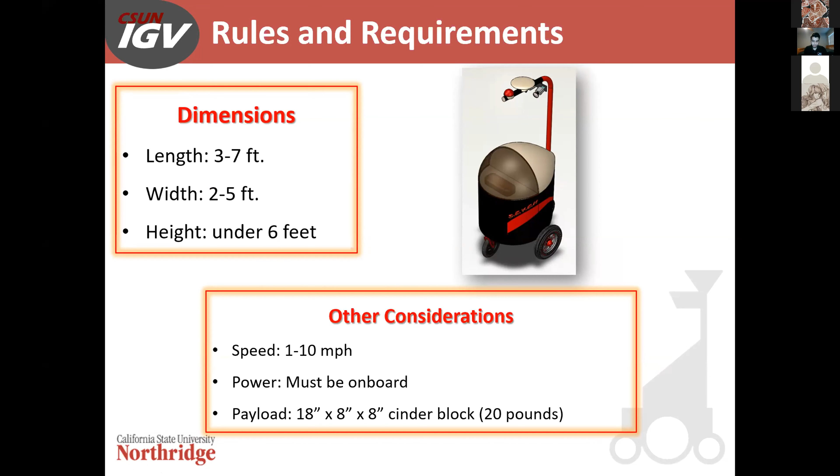Other considerations that are important and provide quite a challenge are weather conditions. Because it is in Michigan, we have to design for rain, high humidity, and high temperature. This is important because we're dealing a lot with sensitive sensors. All of these factors are really critical when designing the robot, just to make sure we don't fry any of our stuff.

Other design considerations that prove quite a challenge are designing this thing to go over grass. The field is almost completely grass, so we have to design our robot with proper suspension to reduce noise for our sensors so we can get accurate readings. We also have to travel over uneven surfaces, mud puddles, speed bumps. There are ramps as obstacles on the field, which are about 20 to 15 degrees. And we even have to design our robot to go over a sand pit.

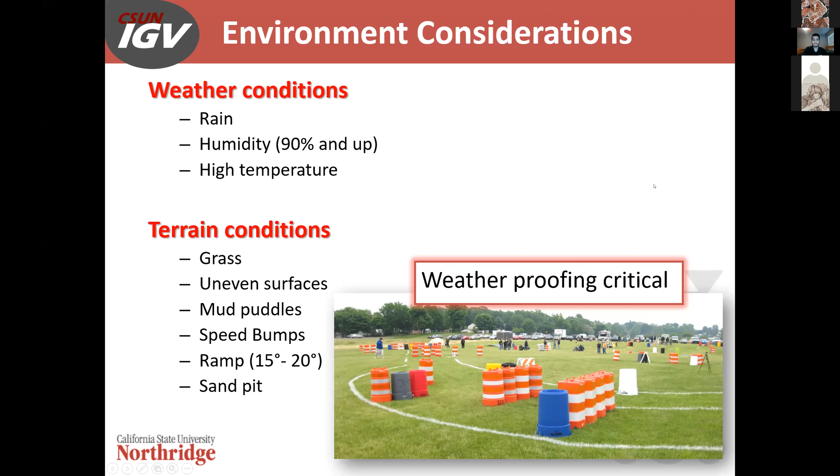Next is our emergency stop. This is a really important aspect to our robot. It allows the judges to safely operate the robot.

The ones we are working with now are a physical e-stop, which is a mushroom switch, and it's basically a physical break in the circuit. The other one we have to deal with is a wireless e-stop, which has to work up to 150 feet away and has to be waterproof.

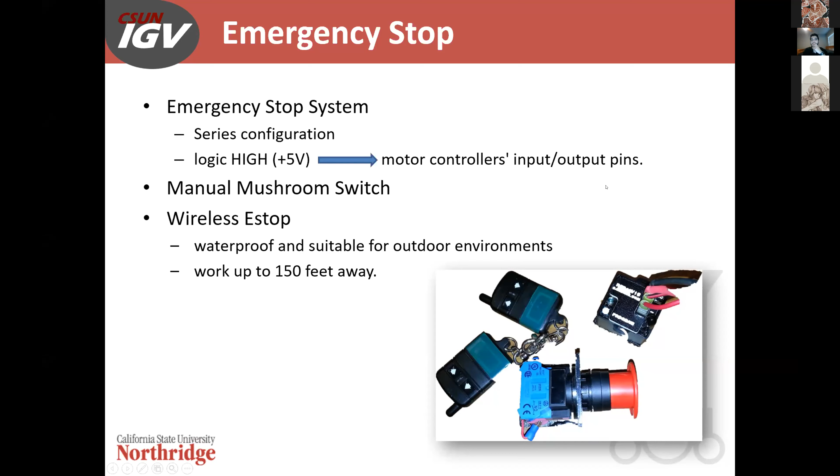So this is the AutoNav challenge, which is the main goal of the robot. It's got to navigate an obstacle course, search for navigational waypoints, stay inside the boundaries of the course, and appropriately avoid flags and barrels. All of this has to be done autonomously.

We do this by creating a cognition, if you will, in which the robot can accurately map its surroundings and navigate through its virtual path. This is the cool part of the robot because it's very cutting edge technology. All the advances in this field have happened within the past 15 years, so it's really awesome to hop on the leading edge of that. We're kind of seeing the fruition of that in warehouses, where they're designing these kinds of robots to do that. But this stuff is really quite new.

So here's an example of what our robot has to do. All these little dots are barrels. Our robot navigates through these white lines, sensing the lines, navigating around the barrels, and hitting all the stars. Then it crosses through a fence, hits all the stars on the other side, and returns back to its position by crossing through a flag field, which requires detecting these little flags and color coding them correctly, passing only on one certain side of them.

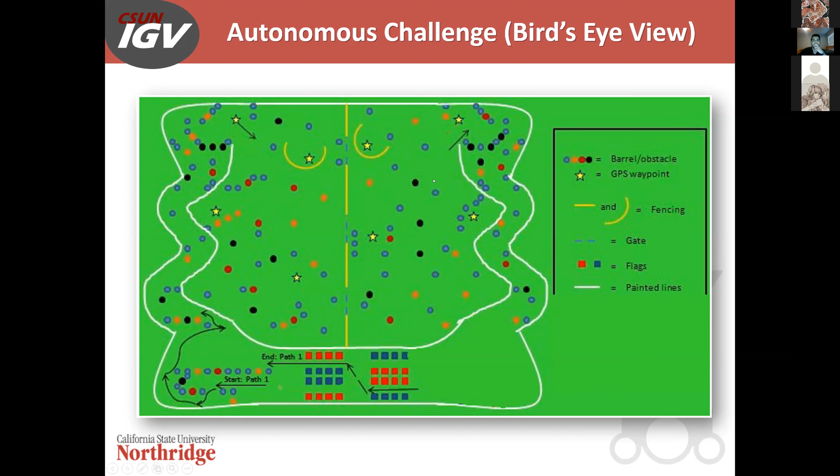So if you want to show them the animation. Yeah, so...

So what's it called? How do we do this? How do we avoid the obstacles? We have to program the robot to build a map by, one, being able to isolate white lines to detect these lanes, and two, distinguish obstacles like flags and barrels. We do this by using vision cameras, laser rangefinders, and LiDAR sensors.

One interesting aspect of this is image processing, in which we use certain techniques to isolate features that can be translated and mapped. We do this by using saturation limits of pixels to detect lines and colors that we can use to appropriately recognize obstacles such as flags.

Next is the IOP challenge. This stands for interoperability profile. Basically, we have to show the judges that a robot can intercommunicate with itself, that it operates coherently with precise goals and is cognitive of its surroundings.

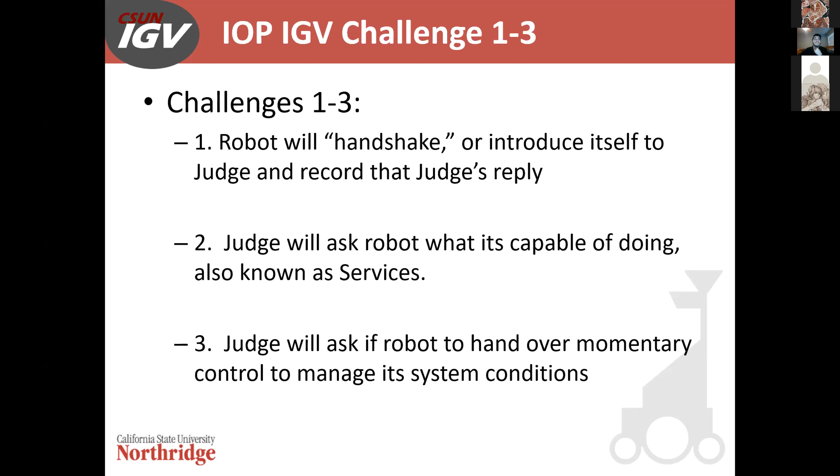This would include being able to introduce itself to the judges, recognize things, tell the judges what it's doing, and hand over momentary control to the judges to manage its system conditions. The other three would be, next slide please.

Being able to tell the judge its velocity state at any given time, report its location and where it's going, and then be able to traverse to 4 specific waypoints or areas of interest autonomously.

Here's an example of all the stuff that we are able to work with. We've got several different sensors, such as cameras, GPSs, DC motors, LiPo batteries, laser rangefinders, LiDAR sensors, e-stops, IMUs (inertial measurement units), and a PCB board.

The cool thing about this—I know you guys are all mechanical engineers, and a lot of this is kind of outside our field—but I think the best part about this project is it really rounds yourself out, especially for those wanting to get into robotics, because you're working so much with sensors that are really prevalent in robotics industry applications today.

You won't be able to get a job anywhere without running into at least laser rangefinders and inertial measurement units. So just getting your hands dirty and rounding yourself out—I've been able to add to my resume quite a bit, because through this project I've had to learn LabVIEW in a more intimate way, and I had to learn Python coding.

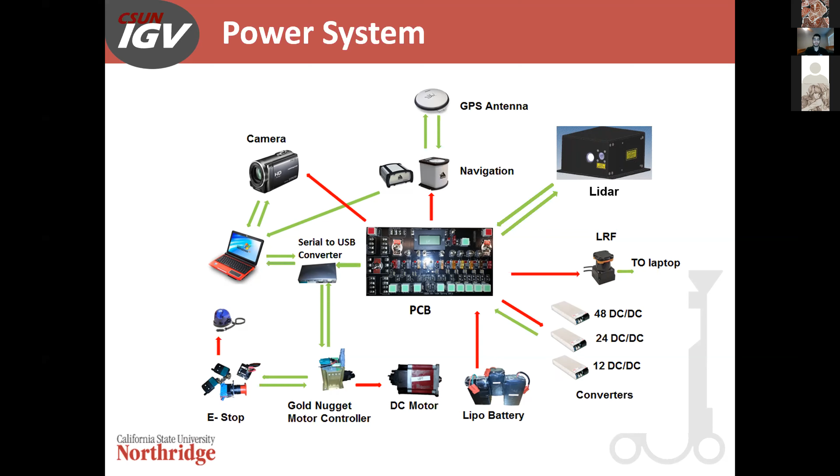So you guys are probably wondering how much these all cost. It's about $60,000 for a new vehicle with all sensors and whatnot. So we do need to do some fundraising and whatnot.

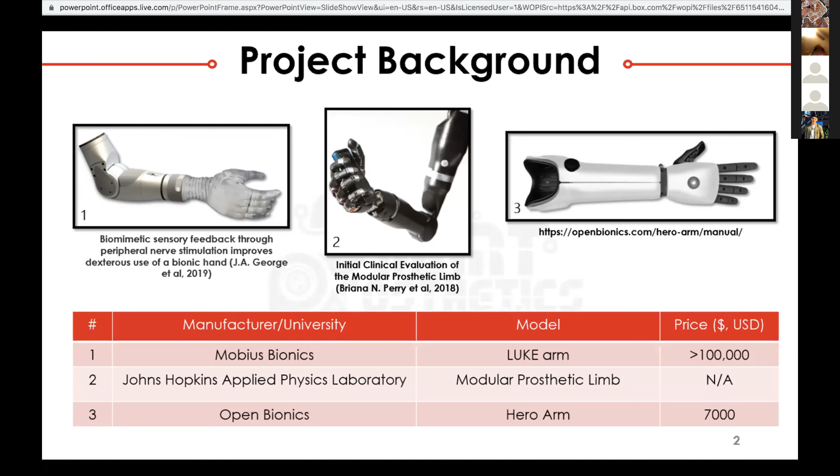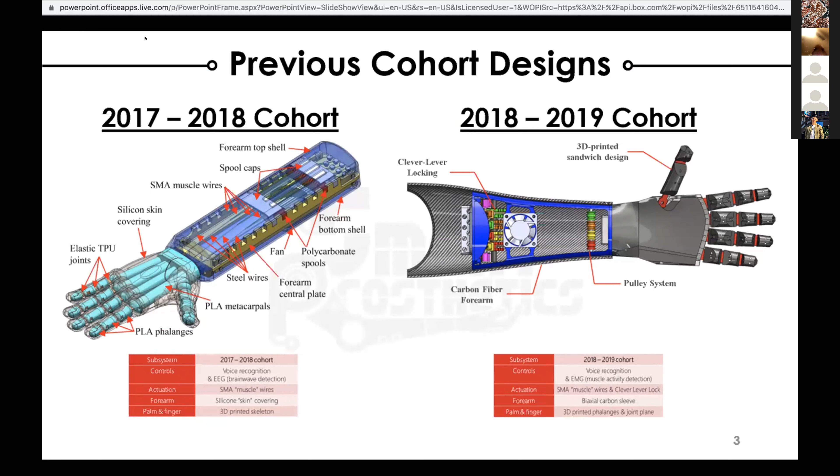So this year's mission statement for our cohort was to design and develop two low-cost and electrically powered transradial prosthesis arms with novel sensing capabilities and increased gripping and lifting strength. With that, our cohort decided to design two arms this year and to completely eliminate the use of SMA wires. Our two designs are the MyOwn and Hall & Oates arms.

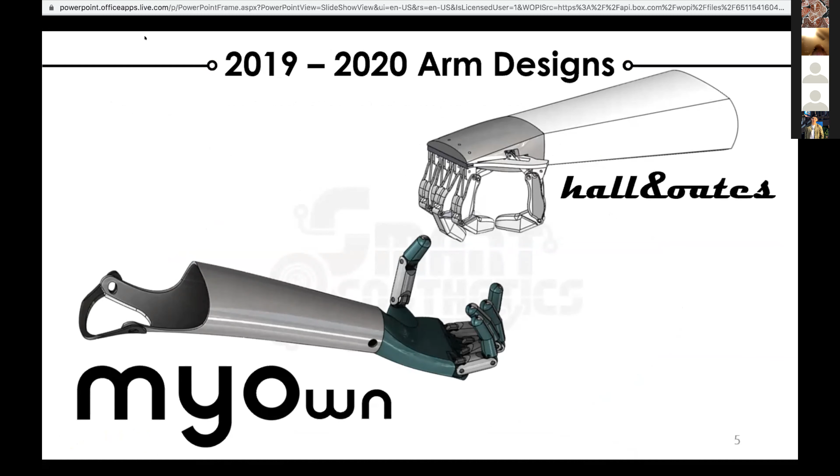Our cohort introduced the application of haptic feedback to provide an amputee a sense of feeling, a whiffletree subsystem that allows for the entire arm to be actuated by one motor, and also pattern recognition.

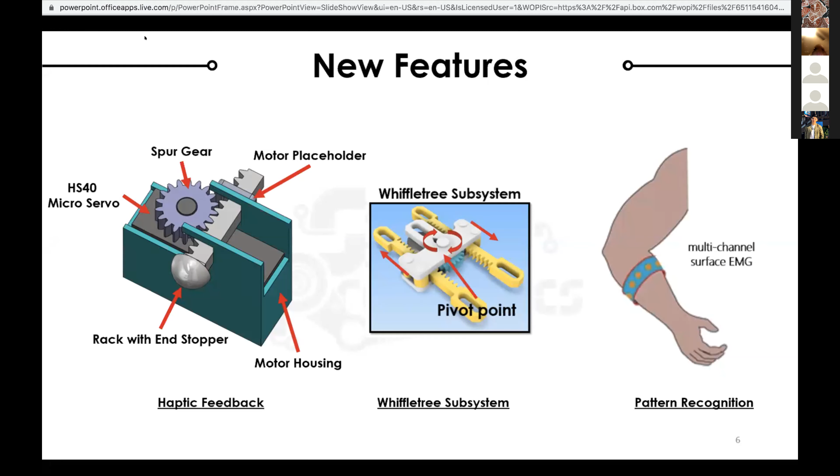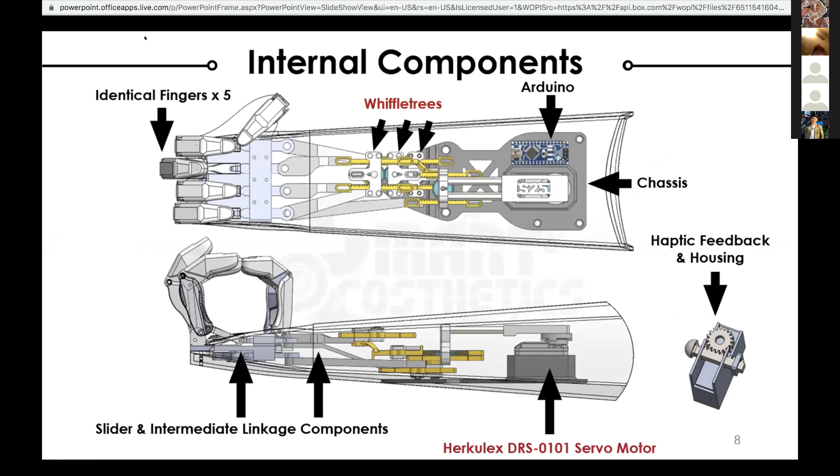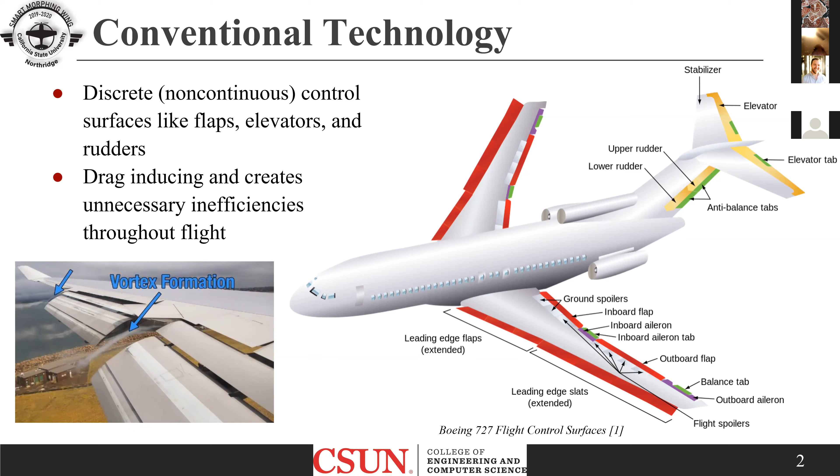So what Morphing Wing wants to do, what morphing technology wants to do, is have a very seamless airfoil. That way you have better aerodynamics and you don't have those inefficiencies. So we have a couple different technologies: span, chord length, sweep, twist, and camber.

Span actually expands the length of the wing. The chord length will increase the width of the wing. Sweep will change the angle of the wing. Twist can be either a variable twist or just a section of the wing that twists.

Camber morphing is a little bit more difficult, but if you draw a line on the cross section of an airfoil that goes from the leading edge to the trailing edge, you take that line, fix it at the leading edge, and have the trailing edge morph up and down. You now have a very complex control surface that morphs the entire tail.

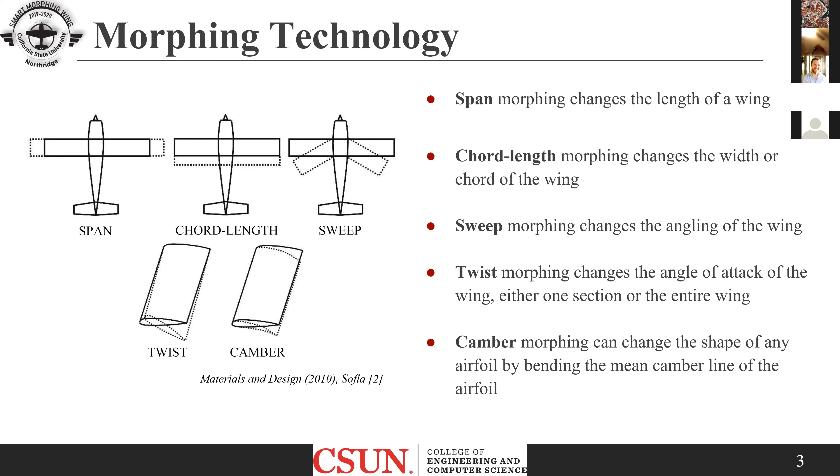Morphing designs have been around for a couple of years, and it started kind of at a component level. This is our 4th year for the morphing wing under Dr. Bishay. In the 2nd year, they actually used a corrugated airfoil, and they used the same SMA wires that Thea talked about for the prosthetics to actuate that.

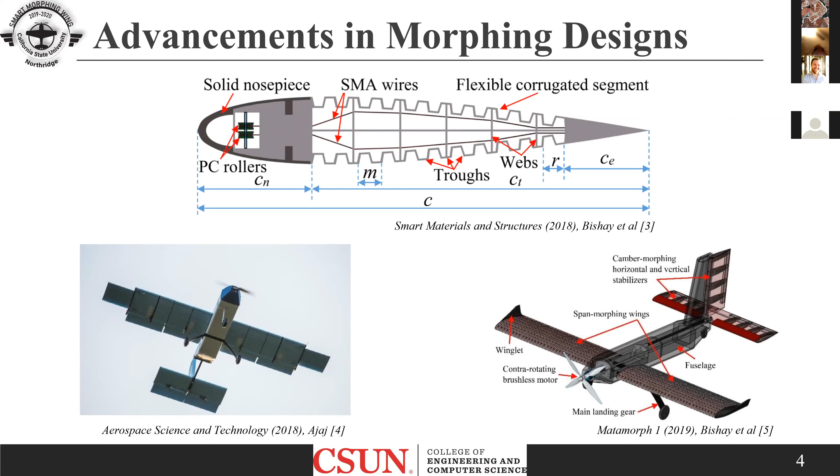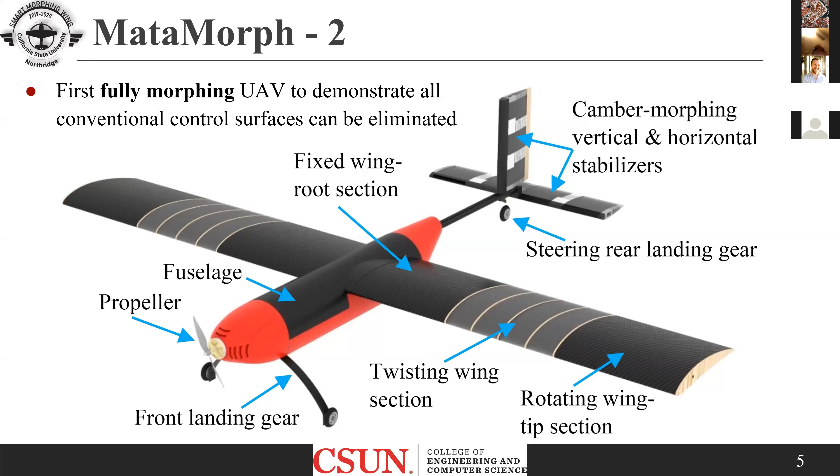So what they actually did is span morphing in the front for the wings, and then camber morphing for the tail. That brings us to our design for this year, which is MataMorph 2. Along the same lines as what the team wanted to do last year, we want to eliminate all those control surfaces and use only morphing technologies. So we ended up going with a twist morphing wing and a camber morphing tail for the back.

Now, that gives you an idea of what a morphing wing is, but the actual project, what we do over the two semesters, is really based on an 11-page research paper that we submit to the AIAA, and then we do a presentation at their student conference. We weren't able to do that presentation this year due to the coronavirus, but we did submit the paper. That paper is backed by our design process and all our computational and physical testing, and that's really all that's required for the research paper.

But our team wants to get first place. In the last two or three years that we've done this competition, we've always been second place to USC. So we feel that designing our own fully functional UAV and doing a test flight will put us in first place.

So what we do is in the fall semester, we do research, our PDR, CDR, and testing. Then as it goes into winter break and into spring semester, we do the manufacturing, some more testing, our paper, and then our competition for AIAA. We also do C Symposium and Senior Design Project Showcase, where we do very well in those competitions.

Now, I kind of wanted to go through the basic level of what we did this year, starting from scratch and getting to our full UAV. What we did is we looked at conventional UAVs that exist right now in the military. We also looked at other experimental UAVs to try to get an idea of the size of what we're capable of building here at CSUN.

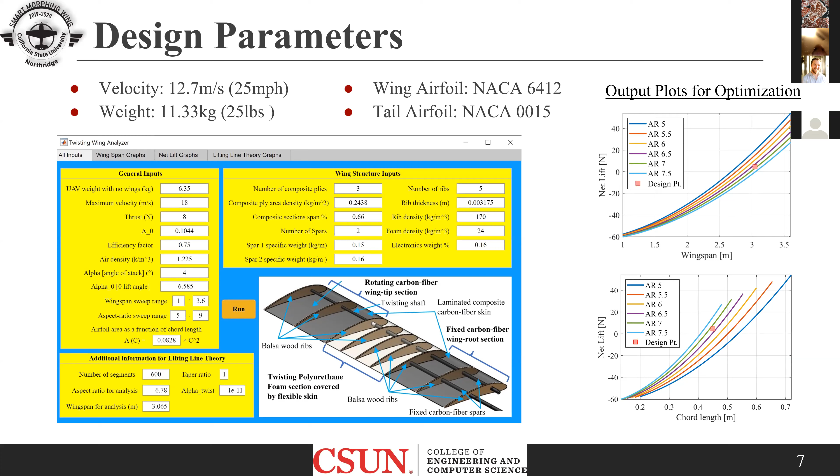So we developed this MATLAB code that helps us take into account the weight of our wings, and it gives us outputs for our net lift versus wingspan and chord length. So we can find the sweet spot of what size the wing needs to be in order to lift our UAV.

And then we take that information and put it into another MATLAB code that gives us the size of the tail based on the inputs for the wing. So as we're doing that iterative process with the wing, we're inputting it into this program and getting results for the tail. Both teams are now talking about what works and what doesn't work, so these tools are very useful in communicating that.

Now the tail team also designed this camber airfoil plotter. What it does is we're able to change the A and B inputs and then change our dimensions from the previous version of the tail, and we're able to output what's needed to create the plot of a cambered airfoil. We use that in our analysis later on.

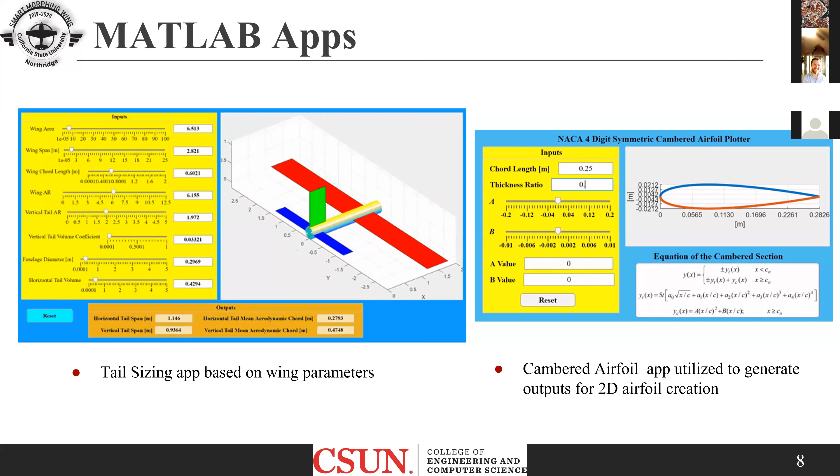We take that into our analysis with CFD, computational fluid dynamics, which is something we've never touched before. It's very similar to doing FEA analysis with SolidWorks that you do in 386, but it has a mind of its own. I personally didn't work on any CFD stuff, but I know the guys that did were pulling their hair out.

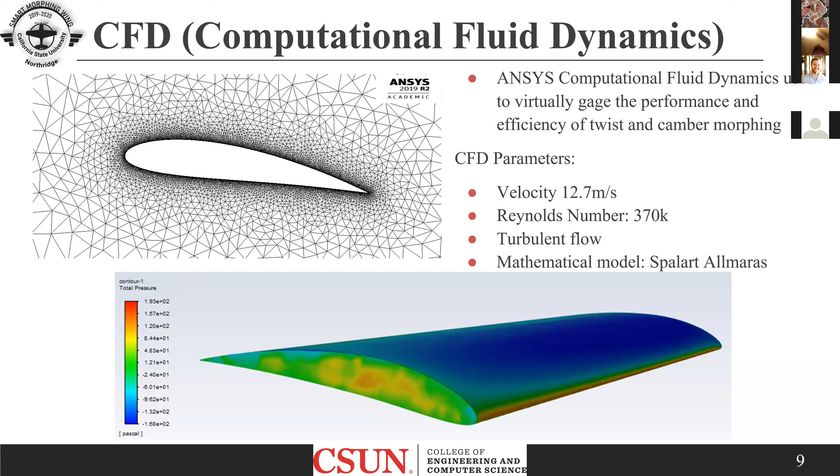But it was a very useful tool that allowed us to virtually study our morphing technology before actually doing any prototyping or physical testing. And it gave us favorable results.

One other thing we did is a comparison of our morphing technology, the camber morphing in the tail, versus other technology that exists on conventional planes. We were able to plot this based on the angle of attack of the control surfaces, with our coefficient of lift versus coefficient of drag, which is kind of a ratio of efficiency of the airfoil.

So you can see that here, in the blue line for our morphing technology, it proves to be a much more efficient and much stronger control surface than existing technologies.

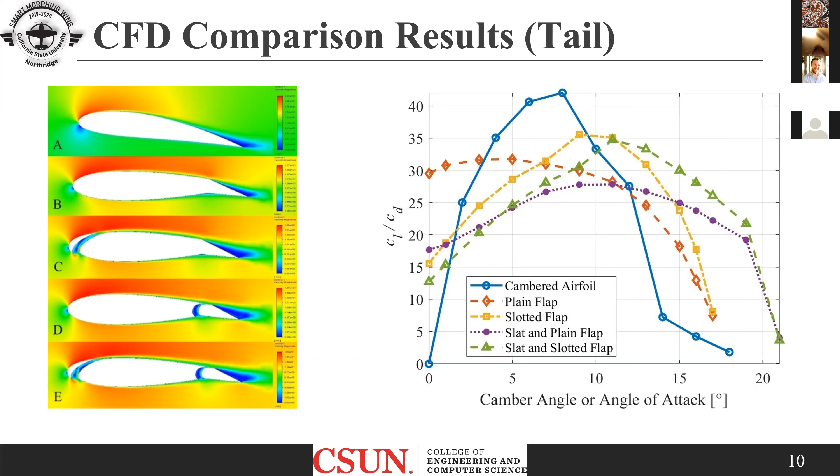That gave us the confidence to go in and start manufacturing. As you can see here, we started manufacturing in picture A, that's our fuselage being attached with the horizontal stabilizer. In picture B, we have the fuselage getting set up with the carbon fiber structure that we're allowed to then put the skin on.

In picture C, that's going to be our molding process from the Keck lab with our carbon fiber hollow wings, under vacuum bag. I believe that was in the paint booth in the machine shop.

Then you have a lot of 3D printed parts for our tail section. And finally, in the last images on the bottom, you got the actual completed tail and the twisting wing that we needed to design.

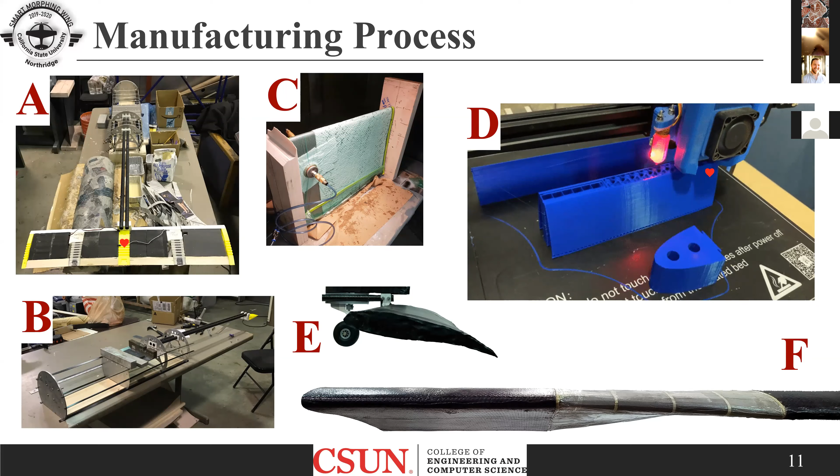So we did actually get the morphing technology working on this MataMorph-2. Unfortunately, we weren't able to do a test flight.

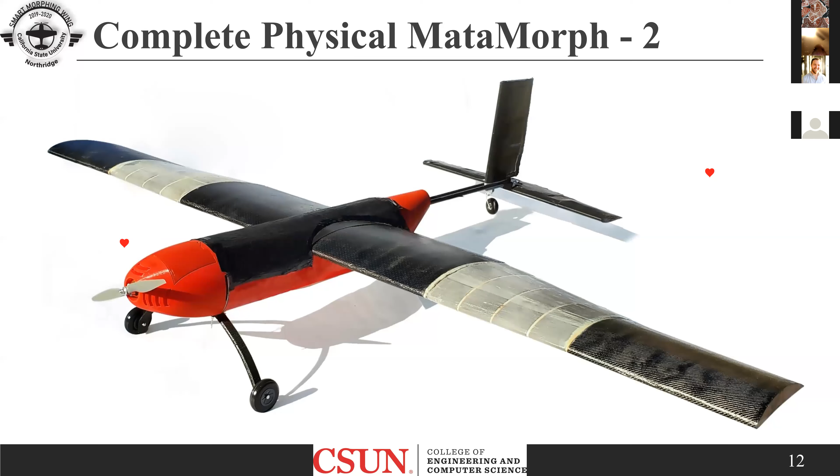Our pilot came in, told us we had a couple things to fix, and then as we all know, the campus was closed. It's very unfortunate, because I think if we were able to do that and put that into our paper, as well as present that we have the first fully functional UAV, we definitely would have gotten first place. So it's a big letdown to get like 95% there in the project and not be able to present what we completed.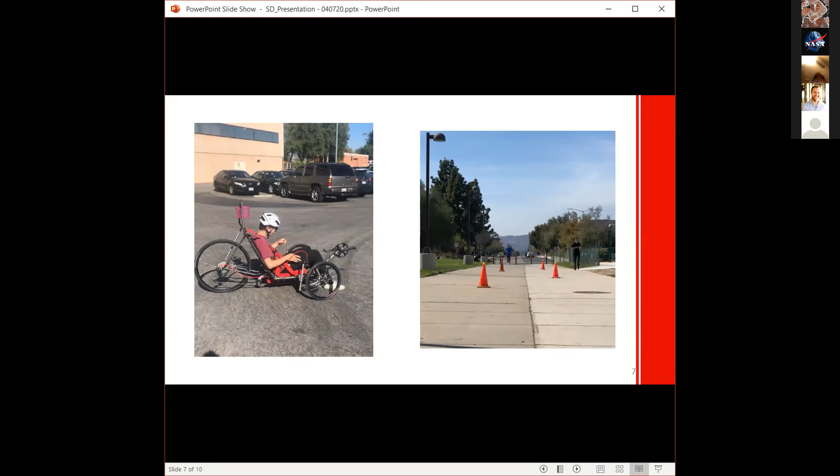This was Deadliest Catch. This was Catch 22. I don't remember which one this one was, but Deadliest Catch and this one both were first place prizes. This was second place, and this was second place prize. Here's just a photo of competition.

In terms of extra skills, none are mandatory to bring to the table if you want to try to join the team. You don't have to know what you're doing with welding, coding, composites, machine shop, or whatever it is. You don't need to have any of that, but it does help. It does help a lot.

It's not about you getting on the team, but you on the team operating. It does help and makes things a lot easier if you already know what you're doing and don't have to learn it on the spot, because you will do it. You will weld, and you will use the machine shop. If you're on fairing, you will work with composites, and if you're in innovation, you will probably work with some form of mechatronics.

It's going to happen. Fundraising is done all by the team. We do get some money from the department, but it's very little. We mostly fundraise, and we do that through events set up by SINT, through donors from companies that people solicit donations from, or a lot of times team members' family will donate.

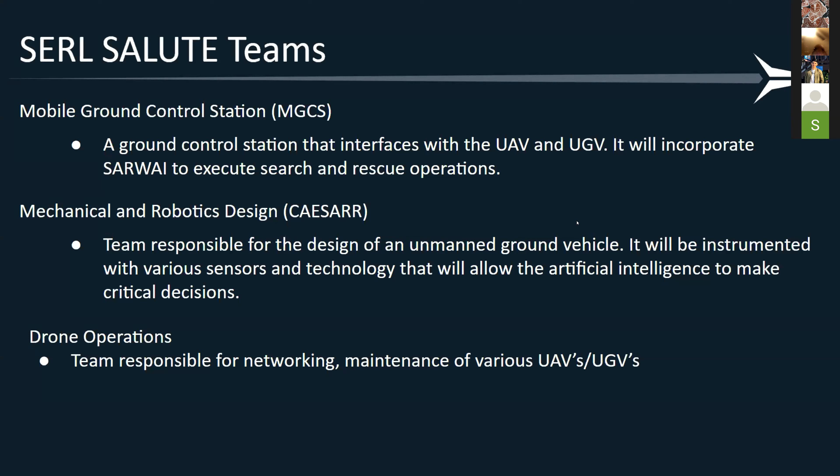Our overall arcing goal in this research is to create a system that helps supporting systems in natural disasters. So we'd have our mobile ground control station, a van that shows up on site and works with other departments to locate people. We're also putting sensors on our CAESARR to look at harmful gases and obstacles around, so we can help coordinate with mainly the fire department and paramedics on how to safely navigate the area.

So here's JIFX—there was one coming up in May we were hoping to go to, but that's not possible now. It's basically to demonstrate our abilities to use these devices with other people in this environment to help. The main idea is to save more lives through natural disasters.

So this is our mobile ground control station. Many of you might have seen this van in the parking lot outside Jacaranda. This is the van we're using for our mobile ground control station. There's going to be a desk in the back for 3 people, an L-shaped wall. This is kind of what the goals were for our design team.

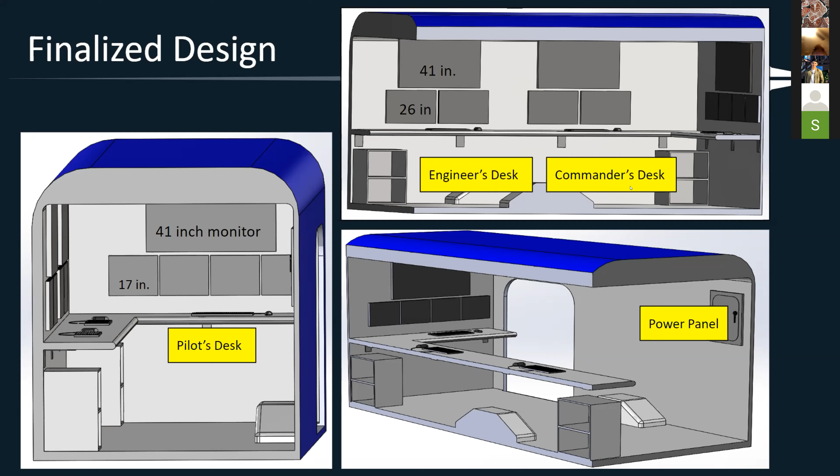This gives a layout of what the van is aimed towards. We had a mock-up desk made of wood in there, but that's come down. The plan is to use some extruded aluminum—if you've been in the Haas lab, it's similar to what the Formula SAE team is using to build their jig table. So we have a little bit of modularity with how our layout looks. Here are a few CAD models of our van.

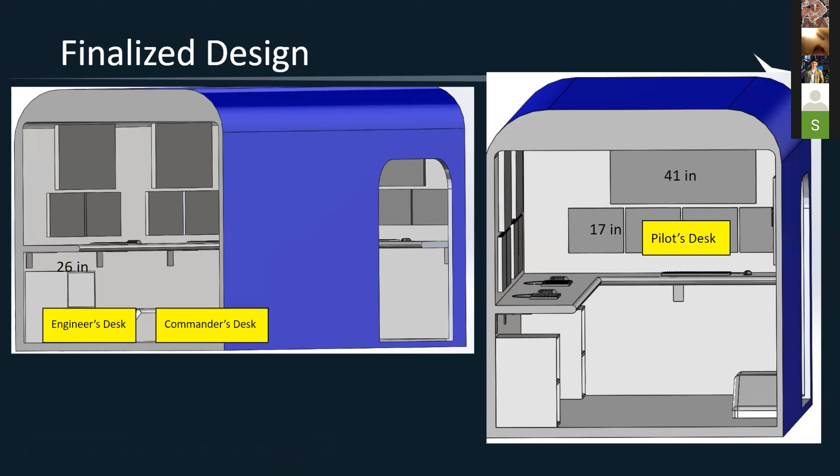There'll be 3 people in there, and then there's also standing room behind the desk for commanders of the other supporting agencies that would be involved in these operations. So this is the aim of the van.

We just got the rooftop AC unit installed just before spring break, which was nice—that was a big thing we were looking forward to getting done. We got it delivered before winter break, and it took some coordinating with the machine shop to cut the hole and everything for that. Solar panels will be installed in the future.

Like I said, it's more of a research project, so a lot of this stuff could end up being redesigned in the future. That's one of the benefits—a lot of this is open to whatever that team wants to do with it.

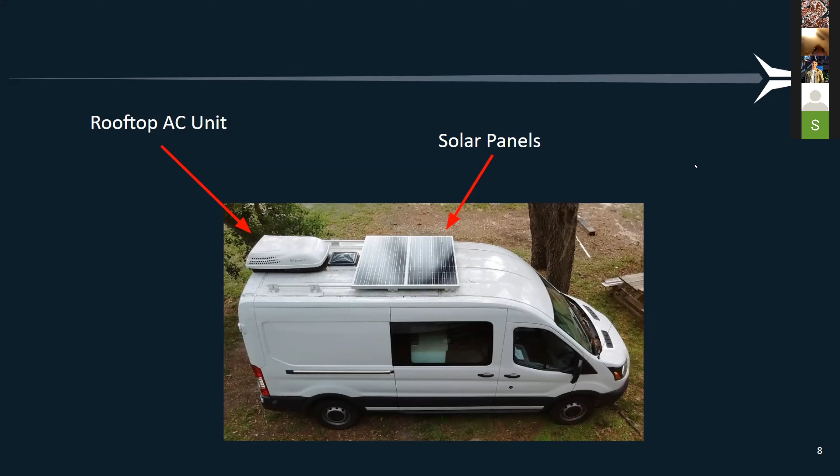We don't have a 200-page manual about what our system has to look like and all these different parameters that we have to adhere to. So it's really kind of open-ended as far as how you guys want to take it and what you guys want to do with the research.

So the CAESARR is the drone that we are making. It stands for Compact Autonomous Exploratory Search and Rescue Rover. It was designed after one of the rovers that JPL is making called the Puffer. So this is the outline of what our design team was going off of for the CAESARR.

So basically, to create a small functional rover that can use this SARWAI software, which was actually developed at CSUN by a computer software team, and it's an AI software that can recognize humans and interact with them. So that is what we will be implementing into all these drones, into all of this hardware, to be able to communicate together and then back to the operators.

So this is the design of the CAESARR. It's being slightly changed right now, some small iterations. We ordered parts and they came in slightly different size than what they were advertised as, so there's some small changes going on with that.

It's currently been printed from PLA, except for the wheels, which are a different flexible material. But everything was printed at CSUN in Dr. Lee's research lab. He's got some 3D printers, so that's what we've been doing with that.

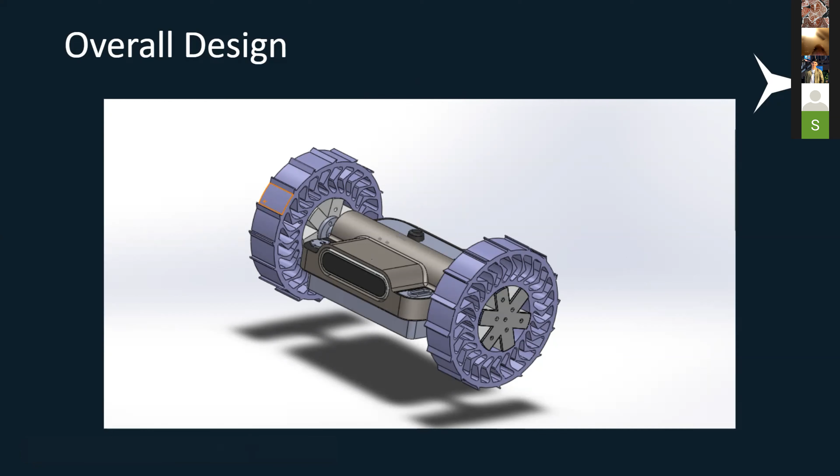This is a camera, so it has LiDAR in it, and then a couple other cameras, and it has its own processing unit, so that's made that camera stick out. But then we have spots for other sensors, speakers, stuff like that, so that way this drone can detect things like harmful gases, and also be able to help analyze the situation of victims that may be stuck. This is just a little bit of an exploded view of that.

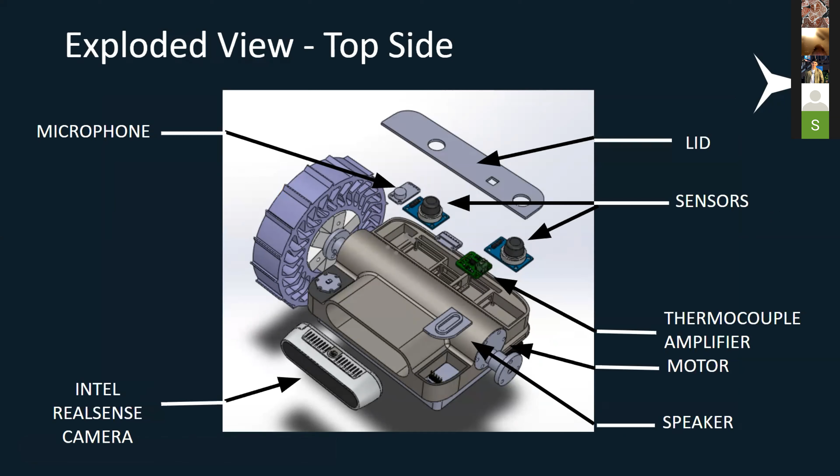We have a couple of electrical engineering students that are also looking at designing our own PCB, so that way we can minimize a lot of the space that these individual components take up. These are all just kind of off-the-shelf things that we're using for plug and play. One of the drawbacks to that is the amount of space they take up, rather than making our own circuit board that has all of these integrated. We can save a lot of space and weight, which then transfers to battery life and operability of the drone.

This is just another view of it. We're using the NVIDIA Jetson Nano, which is kind of the brain behind the CAESARR. So if you have any sort of programming experience - I know HPV was talking about some of that - mechatronics and stuff is really good.

Right now, we're focused on a lot of the control and perception of the CAESARR, which kind of comes with mechatronics, and then also 484, which goes over controls of systems. That's where we're at with the CAESARR.

We also, this semester, started a new team called Drone Ops, and they're basically taking a bunch of the other drones we have in the lab and making them operable, kind of getting them running. There's a lot of stuff that we've kind of accumulated, and we're piecing it together, getting it to work with different sensors, with GPS, with running off of a signal from a computer rather than RF through like a remote control, different things like that. So this is a little bit more on the experimental side, but there is research going into it.

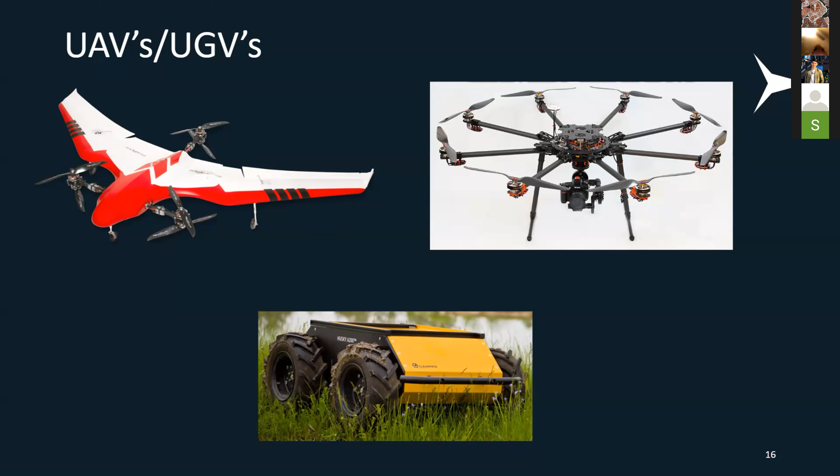As far as drone ops go, if anybody wants to learn anything about ROS, which is Robot Operating System, that's what most of our devices run on. It uses Linux as the operating system. It's a little tricky to get used to, but it's not too bad to get the hang of.

So with that, if you guys have any questions or concerns, Professor Hartman is the one that oversees our project. It was previously advised by Dr. Ho, but he is now busy with this new ARCS project that he's on, so it has been passed off to Professor Hartman. However, Dr. Ho still is in contact with our project and what we do. You can send him or myself an email if you're interested, just to get more information. We can put you on a list so we know you're interested. But do you guys have any questions?

All right, I think. I have a question. Okay. Yeah. Hi, Seth, it's Fern.

So how is the learning curve for your team members, since this seems like a pretty big mechatronics project, and most people aren't taking mechatronics and control systems until they're in their senior year or whatever? How much would you consider the learning curve to be, or is everybody doing programming?

No, not everyone's doing programming. Most of the programming is on our Caesar team because they are developing the entire Caesar from scratch, so that's where most of the programming is. Our mobile ground control station has virtually no programming at all. It's a little bit more hardware based, as far as the desks and the computers, and a little bit electrical as well. And then our drone ops team is more of a collaboration of all the drones, so it's not as much programming as it's more of a systems approach.

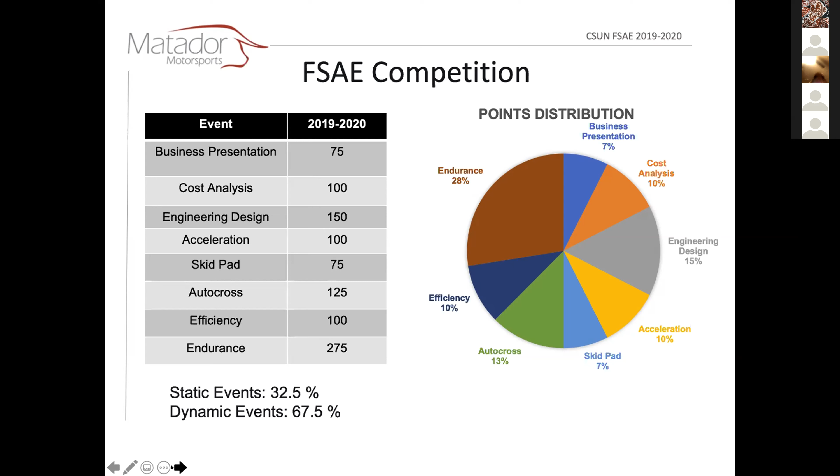For combustion, they measure how much fuel you use. For electric, they measure your initial starting and ending power with a power meter. Next slide, Jake.

So we have our team goals that we set out every year. We have improving our static performance, because we didn't do very well last year in the static events, primarily in the design event.

So it's important to understand the validation of your designs and having presentation practice, improving reliability. We did not finish endurance last year - there was a small component that caused a much larger failure. So our goal this year was to improve the reliability for both vehicles.

And then, our Formula SAE program in terms of our club, including more volunteers, maintaining equipment, and equalizing workloads so that people weren't overloaded in one regard and bored in the other. So that's more on the managerial side.

Again, unfortunately, we didn't get to go to our competition like everyone else, I think, except for maybe Aero. But yeah, we'll get to that in a minute.

Jake, next slide please. So this is our design matrix. This is what Dr. Prince gave us to use for dictating the design of both vehicles.

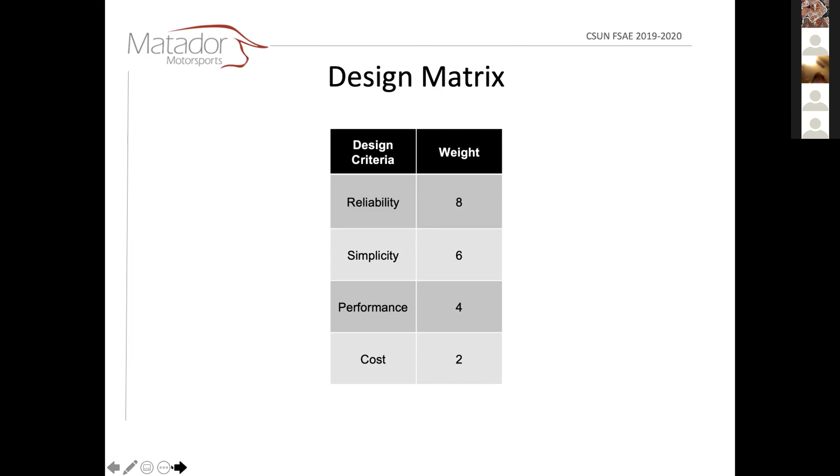Our third weight was performance. We still need a car that performs really well. And our last design criteria was cost. We still need something that can do well in the cost event.

Next slide, please, Jake. Actually, Jake, this is you - you should talk about your team structure here really quick. Yeah, no problem. So I'm Jake, I'm the project manager for the internal combustion car for the 2020 year.

We have different sub teams encompassing that car, and here you can see the structure. We have the aerodynamics team, and I'll get into all these subsystems in a little more detail later, but here you have aerodynamics, which is like our skunk works - they do all the magic stuff.

You got chassis, and that's Fern - he's over there, he's here, he's our chassis boy. And controls is run by Josh Shepard.

They do all of the systems that the actual driver interacts with. So it's one of our weaker points, and it's one of the easiest actually to get right, but it does take some innovative thinking. So you have your steering wheel, and all your systems, like your shifting system and your pedals.

The pedals is one thing that's really overlooked because it has to be ergonomic and adjustable for the actual driver to be pleasurable to drive, but also perform its purpose. It's actually a lot more complicated than people think, and it usually ends up getting redesigned and thrown together at the last minute. This year Josh Shepard did a really good job designing the brake, or the pedal box assembly.

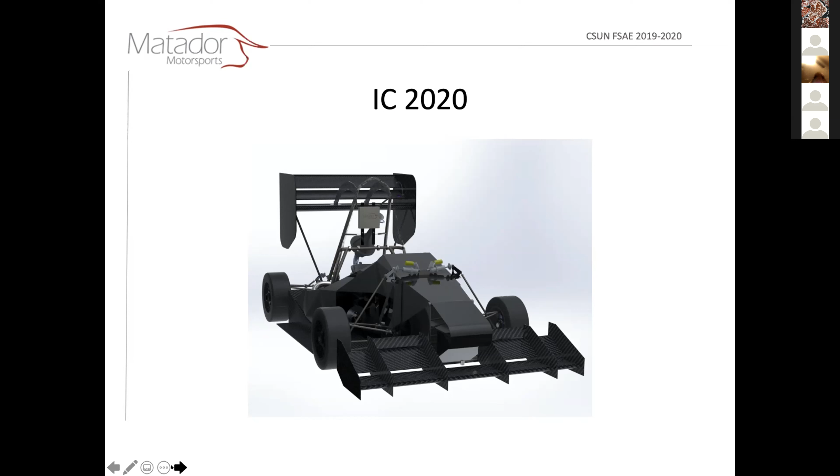And then the intake plenum, which is that big thing that looks like a gourd on the back of the car - that's our intake plenum, and it's really a marvel of design. I've had a lot of fun manufacturing it. I 3D printed that on our 3D printer with Nylon X, which is carbon fiber reinforced nylon - that was fun learning how to do.

Our muffler also had a redesign this year in order to better pass sound without stuffing it full of material. We have a Drexler adjustable differential and a pneumatic shifting system, and our wheels are also made out of carbon fiber. There's a lot of carbon composites work on this car, which is really exciting to do.

Yeah, and I think that's about all I have. I'll throw it back to Morgan - he can talk about the electric car.

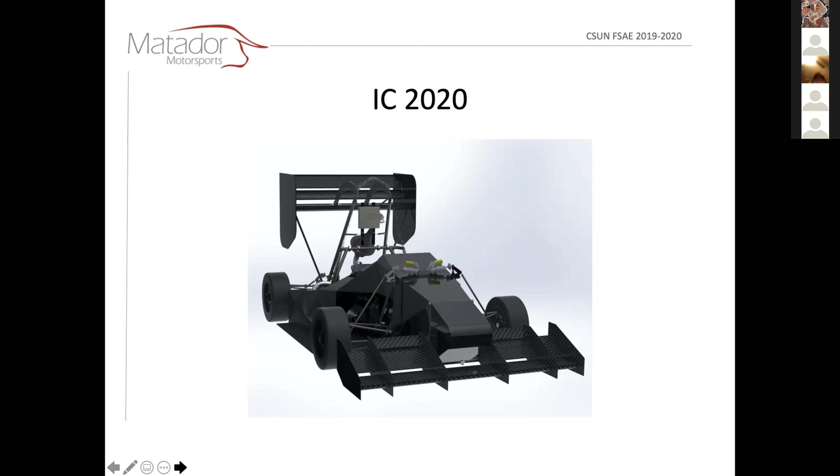So last year, just a brief backstory - we tried to convert an older combustion car into an electric car. It was a great idea in theory, because we'd get a rolling chassis and all we had to do was install an electric drivetrain. Except that was an absolute nightmare, so we scrapped all that and decided to build our own car from the ground up.

As far as the Aero team goes, they kept it very simple. They were just going to do a simple body and a flat under tray portion of the vehicle, no wings. That would just increase complexity for our vehicle. We were again just trying to get a simple car going for our first official electric car.

The chassis team had to completely redesign the electric chassis to house all of the new tractive system, the electric drivetrain. We had the addition of a data acquisition system. Because we've never built an electric car before, we wanted to closely monitor all of the performance metrics of the vehicle to make sure we didn't have any big scary battery fires.

We had a data acquisition team design an entire system from scratch. They did all of the coding themselves. They were all a bunch of computer science majors, and they made their own website that they hosted on a server. So the live feed would actually upload to the server, and you could view it on the website in real time.

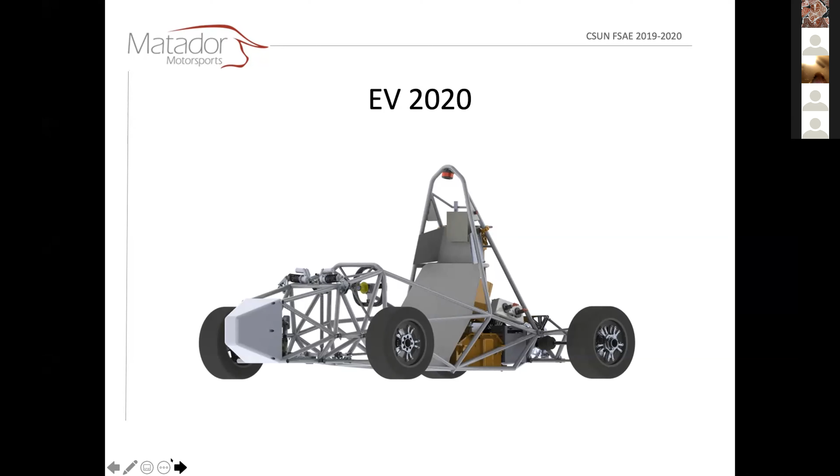So really, talking about the design of a race car, it's all done in CAD, the theoretical model. It is based on a lot of research that you do in the beginning. Really, the whole summer is a lot of testing and research, and that's where we started. You really need to understand what you've been given in terms of last year's car or cars. They're invaluable resources to figuring out what's wrong with it, what can we make better, and so this is kind of where you start.

You're given the CAD models from last year, and you can start working towards what changes you think you need to see, and that kind of thing.

You go through your PDR where you select your overall design envelope for the car, how light it should be, how much power you should make, what size engine you should use. Those decisions are made very early on in the design cycle, and then later on you start to really get into the meat and potatoes of it, where you select, okay, what differential is the best differential to solve this problem.

That's where we came up with, this year we wanted to use the Drexler. It balanced all the things we wanted. It was pretty low in cost. It performed amazingly. The weight was pretty low. It was simple for us to use because we could just buy it off the shelf and install it.

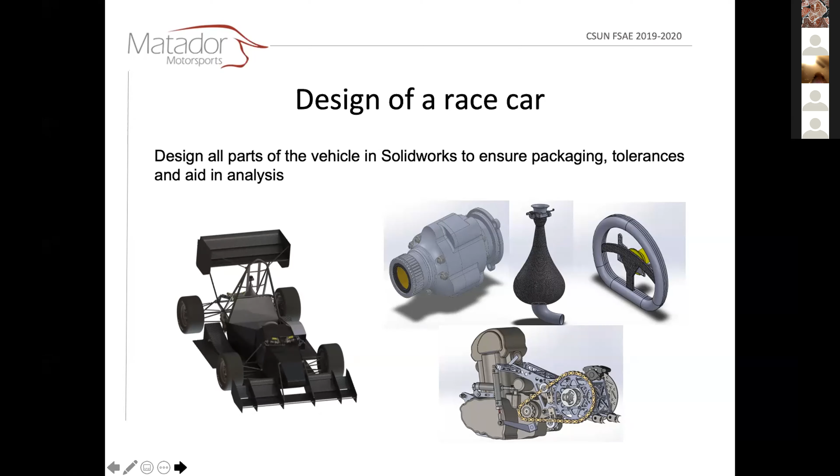So this goes into analysis, where you make your design and then you analyze your design. And this is very back and forth. I'm sure Fern can talk your ear off about how many design iterations he went through of the chassis and all the FEA he did. And yeah, it's a lot.

All the different things listed here are what we use: SolidWorks, ANSYS, MATLAB, Ricardo Wave. Ricardo Wave is our internal flow, or 1D flow sim for our engine. We use Excel simulators, and we build models.

You really get into a lot of really cool design work, and you can get involved in a lot of different things with Formula SAE. We really have a lot to offer.

You have to maximize your design for all your different events, whether it be acceleration, braking, turning, cornering, and then your combination of loads. Last year had a really hard time with that when they redesigned the suspension. It was under combined loading scenarios during your highest loads that we saw failures in suspension, so that was a lot of lessons learned.

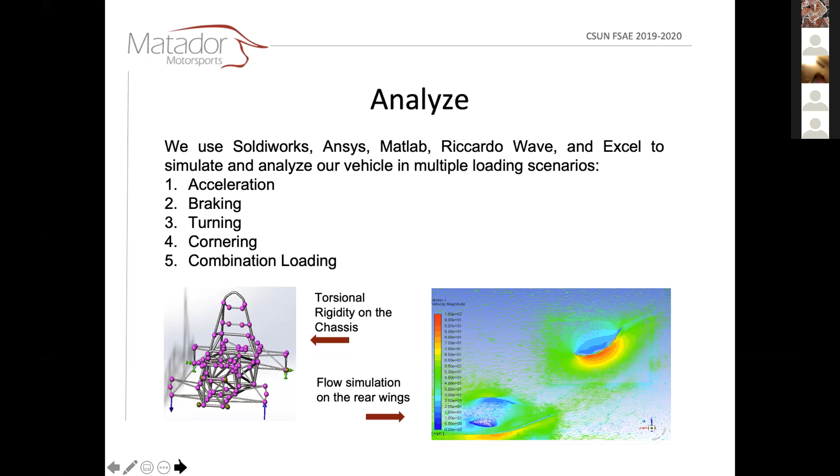For manufacturing, we have a very big project, so manufacturing is very hands-on. A lot of people get their hands dirty. We not only use our CNC machines that I'm sure you've seen in the Haas lab, but we use the machine shop too. That's another invaluable resource. A lot of people are recommended to take the 431 machining class.

I've been running the Raise 3D printer. We have our 3D printing where we print brackets and all kinds of things with carbon fiber nylon, PLA for rapid prototyping. And then we have our wire EDM, which is a super accurate machine, very interesting piece of equipment. Not many examples of those you see, but that's something unique that allows us to do really accurate spline patterns.

Really cool stuff. And then we do a lot of welding in-house. Our whole chassis, both chassis, were welded in-house. On our chassis table, you can see an example of someone welding a chassis right there at the top right, and you can see the VF4SS right on the bottom left.

Yeah, it's manufacturing. You really get to get your hands dirty, and because Formula is such a big project, you can really get involved with a lot of different things, and you get out as much as you put in.

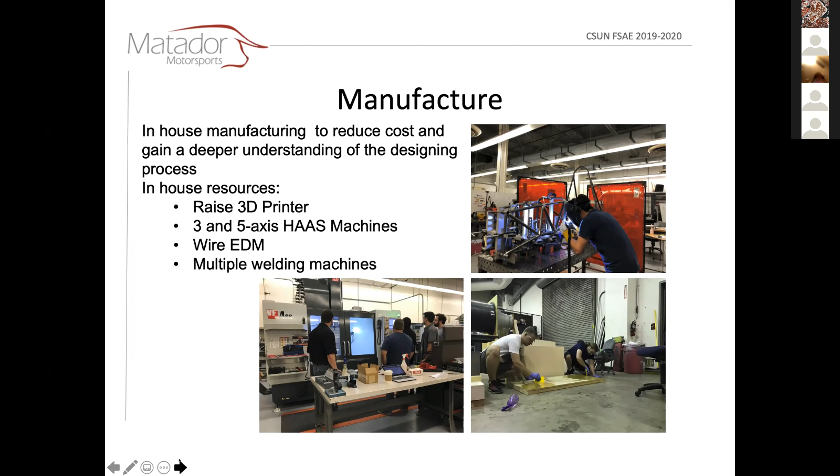And then testing. This is the part that a lot of people find really fun. Morgan gets to take the car out and rip it, and it's pretty cool. It's very entertaining to go out and watch a student creation go out there and just rip it on the track.

During testing, you really want to get about 20 hours on the car, which will really shake down the car and show the weak points. Last year we failed to do that.

It's really hard because we're building such a complex machine now, where in a lot of years past it was a lot simpler, so you could expedite that manufacturing process. Now it's become very complex, so testing time has become shorter and shorter, which is really heartbreaking and unfortunate, because after the competition we were able to take last year's car and really put it through its paces, and it showed itself to be a really great performing vehicle. We made some small changes and wanted to make ours really great too, but unfortunately it looks like we're not going to be able to do that.

But yeah, here's a little video of Morgan ripping it around in the F10 lot.

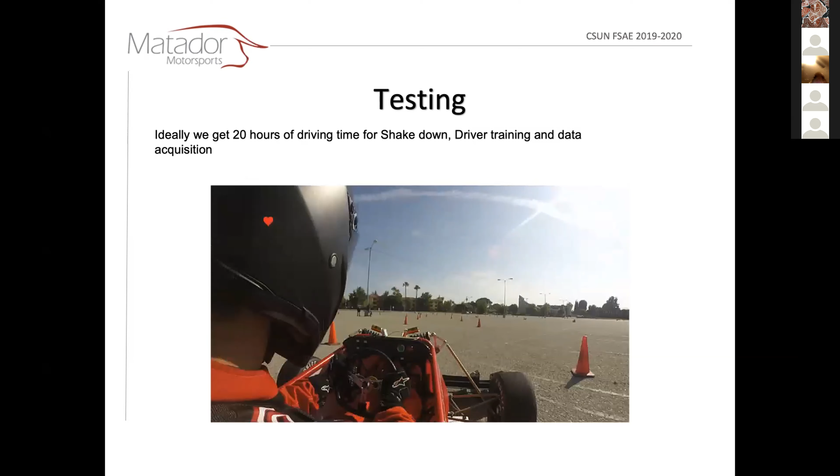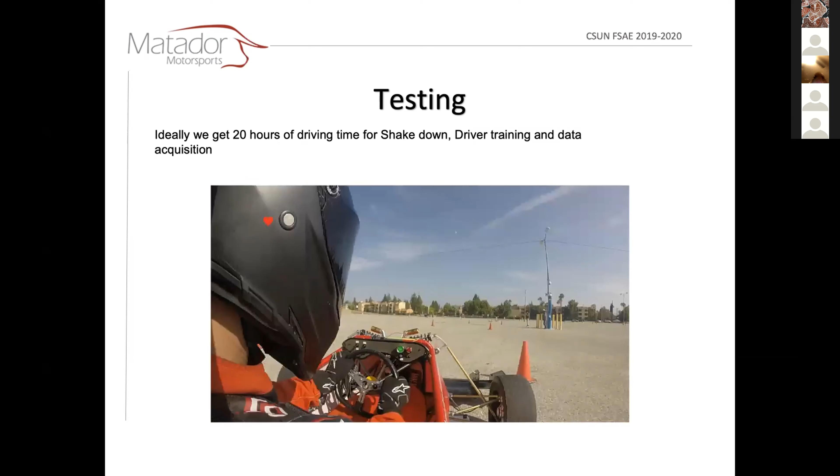I don't know if you've heard a 450 dirt bike engine, you've pretty much heard our car. It sounds like a dirt bike.

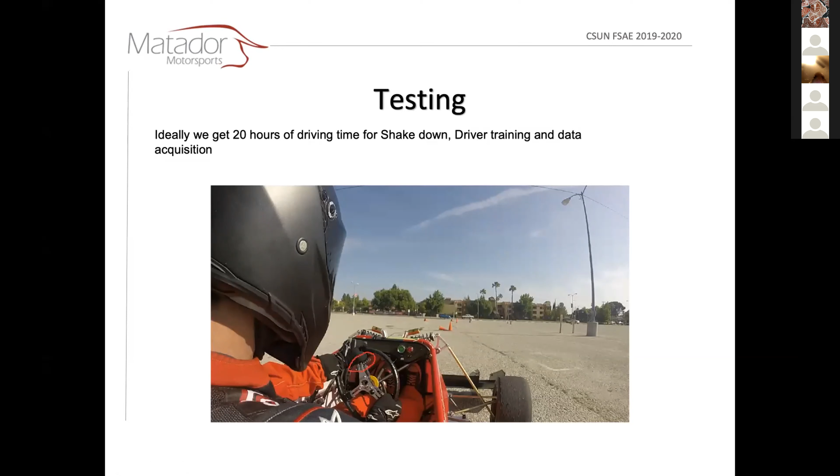I don't know if you could see Morgan shift using the sequential shifters there, but that's a pneumatic shifter that interrupts the ignition and actually just slams the transmission to gears. Really cool system. Yeah, right there, perfect. You can see a little more of it, but anyway, I'll go on to the next bit.

There's another picture of Morgan ripping it, I'm pretty sure that's Adams. Am I right, Morgan? That was at SoCal Shootout. Yeah, that was one of the longest runs we had put on that car. I think that day we put about 50 kilometers of racing on it.

One really cool part about that I'd like to share is that, god, what's going on with this thing? Have you ever used a computer before? I know, right, it's this mouse.

Hey, watch your language, buddy. So one really cool thing about this event was we were probably one of the most reliable cars out there. Every time they walked up they're like, hey, other cars are broken down, are you guys able to go? We were like, hell yeah.

So we were really happy, and it's cool because volunteers can come out and you guys can get involved and go to these events. Even if next year you're not on senior design, you can come out and do this stuff with us, it's open to everybody. It's a very cool learning experience.

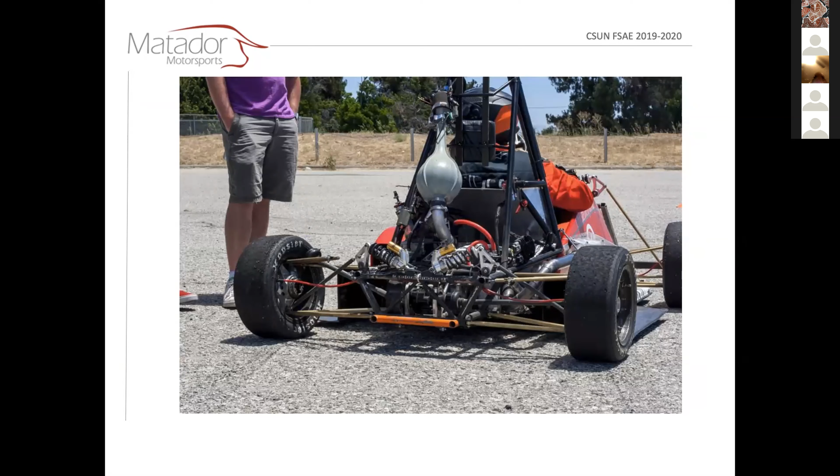Here's the back end, there's that gourd I was kind of talking about. You can see the rear suspension, the old differential. Rear suspension broken, yeah, rear suspension broken.

This is actually the result of a cone hit, and this is why testing is important, because we're designing everything to such a low factor of safety that even minor increases in loading scenarios, unexpected loading scenarios, can break components on this vehicle.

So obviously some components were redesigned after this, but this is just from hitting a cone. You can see how fragile this car has become, because it's become so light and weight optimized. That's kind of where we realized at the end of last year, hey, we should probably step back, and that's when Dr. Prince actually made the decision to make reliability the number one goal. But again, that's just the importance of testing and your design validation. So yeah, it's definitely not a perfect process, but it's all encompassing, and I wouldn't have done anything else.

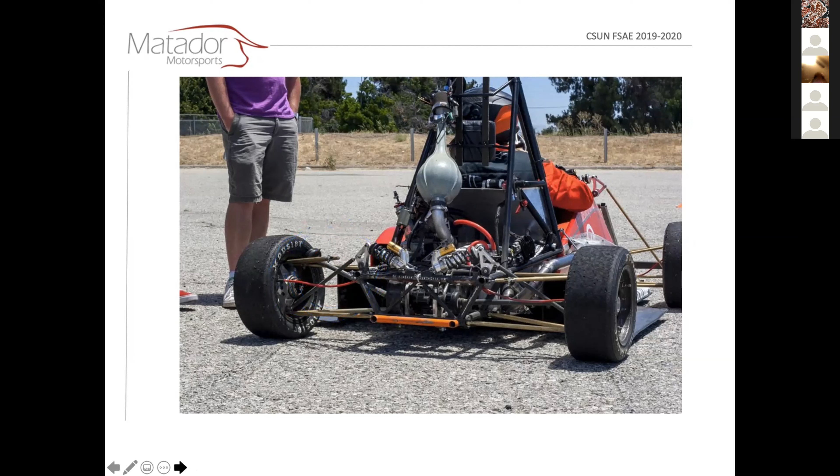Before anyone has any questions, from Dr. Prince himself, he's expecting only one senior design class for next year. This year there were two separate ones, but for next year it will be between 20 and 25 students that can join the official senior design for FSAE. Basically, you guys will be either using or taking both cars from this year, whether or not we complete them, and you'll be racing them for next year. I know he will want you guys to still do research, design, and manufacturing on your own. What that will be, I don't know.

Maybe there has been talk of going to a carbon fiber monocoque chassis, and if that's the case, that's a monumental leap forward, because you guys can basically cut 25 pounds off of a car that basically weighs 330 pounds. That's substantial, and is a huge amount of design points in the process. Additionally, the electric car is still under development, and will probably take a couple more years before it's functioning at the same level that the internal combustion vehicle will be at.